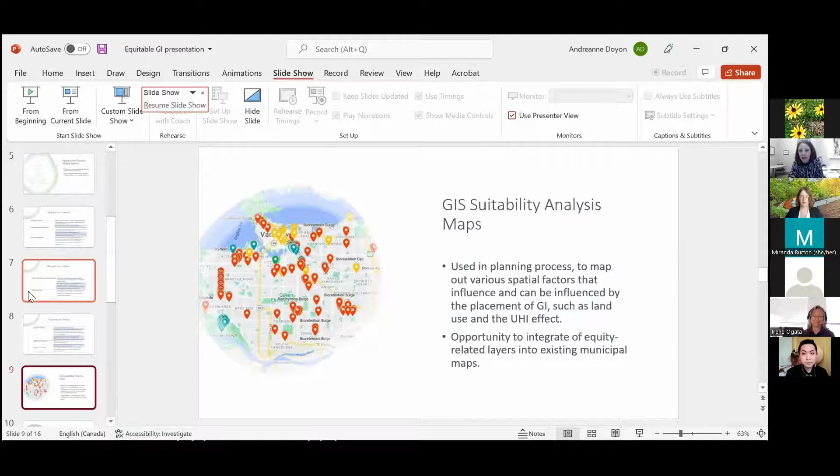And again, this is something that's used across municipalities in a variety of different ways. We developed, or brought together from existing resources, four different variables that should be kept in mind—built environment variables that cover the more technical and environmental components of green infrastructure.

Investment variables, so really focusing on areas of urban growth, but also looking at past capital investment locations. Looking at socio-demographic variables, and the importance of disaggregating that data so that you can provide different layers depending on target audiences, or being able to understand communities and locations and individuals differently. And then thinking about accessibility and health variables, as well as being a little bit different to socio-demographic.

So we think that having more of this information, I guess a big part of equitable decision making is actually about data, and the data that we collect and have available to us to be able to promote better decision making.

So in closing, it's really about acknowledging and internalizing that green infrastructure implementation or decision making goes beyond technical and biological considerations, and we need to think much more in terms of financial, equity, political, institutional, cultural, and so on.

And if we continue to neglect this, we're going to continue to perpetuate existing inequities and create new ones in terms of who has access to the benefits of green infrastructure. So our hope is that if more municipalities can incorporate these types of processes, variables, or dimensions into their work, we can actually lead to more equitable places through green infrastructure implementation.

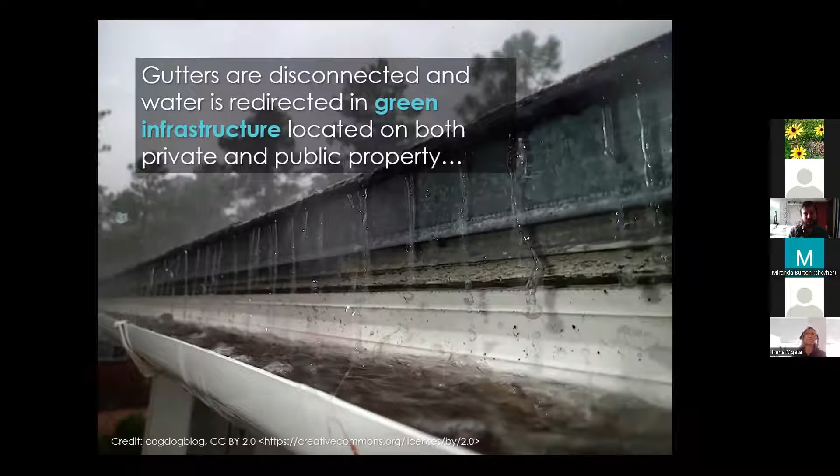This particular sharing of infrastructure between the public and private sectors we refer to as mutualization, which by definition is just the sharing of resources, whether human or material, between the private and public sector to achieve a certain goal. Here, it's to have green infrastructure. Before our project, it was not possible to manage water from private property on public land, so this was an innovation we had to work on to make this project possible.

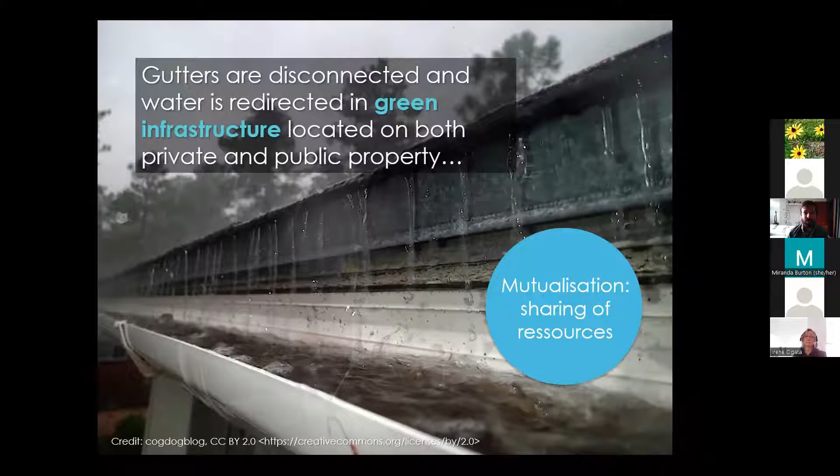The second aspect, which is really important to us, is that we take this opportunity while doing the green infrastructure to design the living spaces by and for the community.

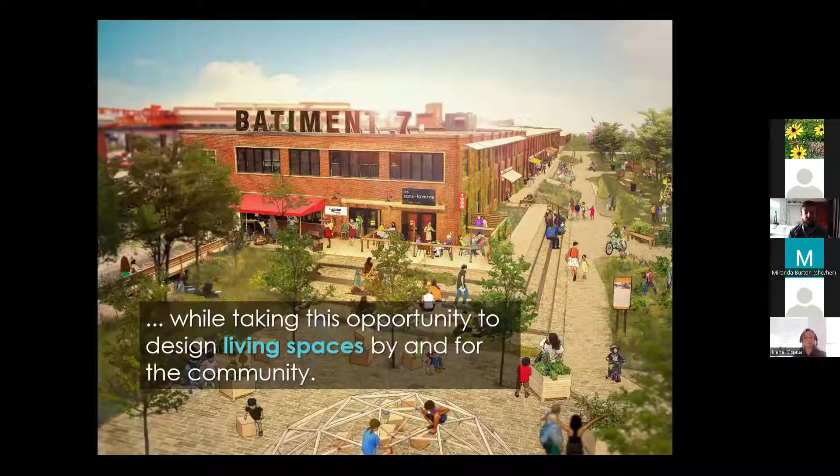We have many goals with the project: sustainable rainwater management, demonstrating that climate change adaptation is feasible, experimenting with innovative practices, and increasing community involvement in improving their living spaces. Today we'll focus more on community involvement as it relates to equity, but we'll also see some innovative practices we've tried to integrate, especially alternative modes of governance for green infrastructure projects.

The Blue Green Alley project sits squarely at number 5. It's really a decide-together, partner-type project.

Let me tell you more about this history so you'll get a better perspective. The Blue Green Alleyway project started in 2011 with the production of a service offer by Vinci Consultants, an urban planning firm in the city of Montreal. They proposed the concept of a Blue-Green Alley as a solution for rainwater management at a larger scale for the city. From then on, many partners joined the project through what we call the Alliance Ruelle Bleu Verte, an innovative partnership with 5 members.

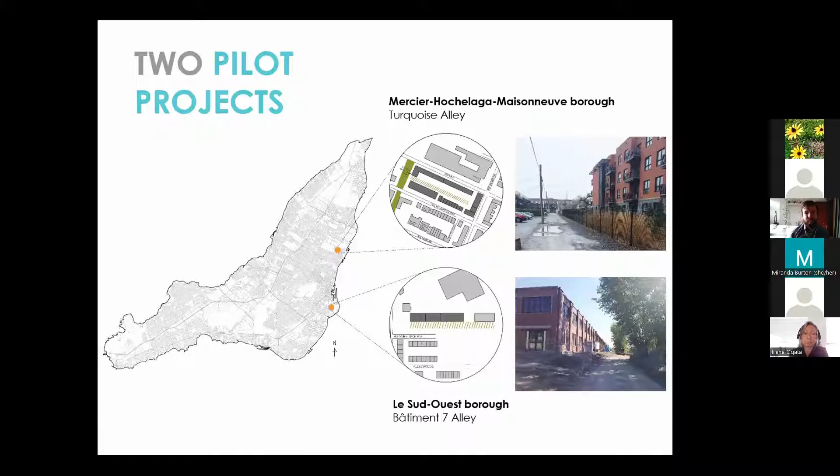We have 2, one in the Mercier Hochelaga Maisonneuve borough, so it's a turquoise alley. And we have another one in the Sud-Ouest borough, which is the Bâtiment 7 alley. And today we'll focus a bit more on the Bâtiment 7 alley.

It was chosen to move forward first simply because it was slightly simpler. There was only 2 owners to deal with, the 7 à Nous collective and the City of Montreal. So it was a bit easier for us to manage only 2 than many more landowners.

I won't get much into the details of what is the Bâtiment 7, but it is an extremely interesting project and demonstration of citizen reappropriation. So just a small history, in the early 2000s, these were buildings that were owned by the Canadian National Railway Company, and they were sold to a private real estate company for $1.

And it's through citizen protest and organizing that eventually the community gained the ownership of these buildings and these lands. And now they're managed by the community through the 7 à Nous collective. So it's really interesting, Google it. It's a fascinating project. But we'll focus more now on the alley.

We'll also work - it's going to be built during the spring and summer of 2022. So we'll work as well on how to plant trees, and we'll have an integration with the community. And all these activities led to the designs that I'm going to show you today. Not many people have seen it, so you can feel very special today.

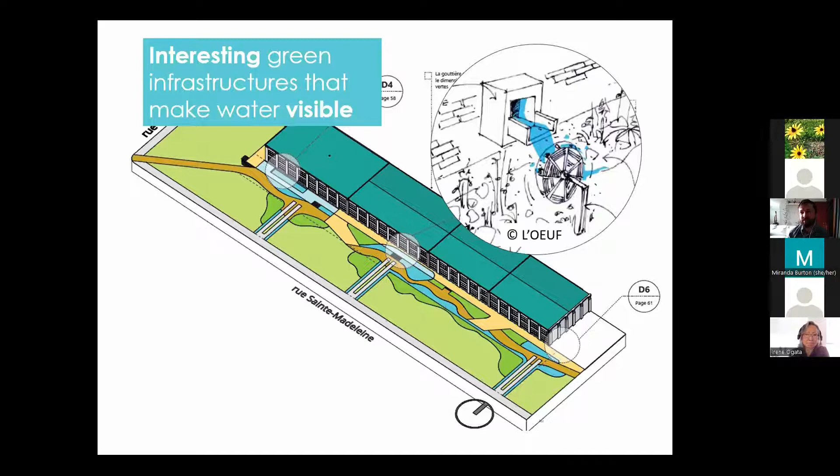And so the goal that was identified is to have some green infrastructures that were interesting to look at, that made the water visible, that were pleasing to the eye, but also that would bring back the water into sight. So we have some rain wheels that will be installed where the water will activate the wheel when the rain falls. We'll have some rain chains that will replace opaque gutters that will let the passersby see the water as it goes down.

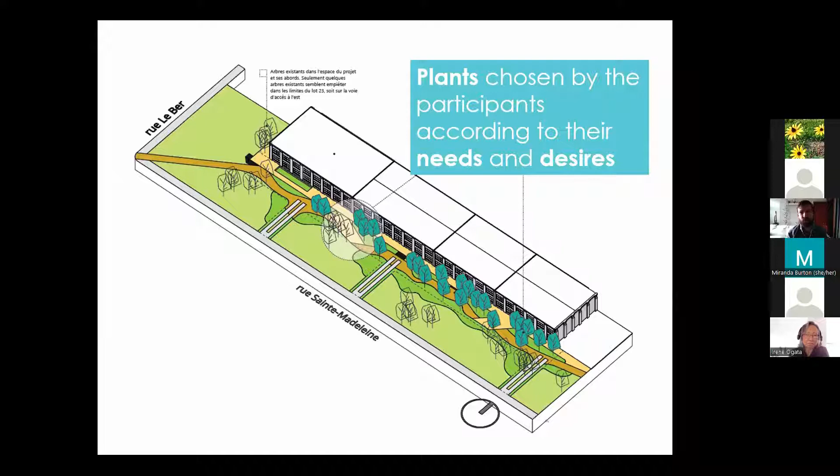We'll also, well, all the plants that were chosen by the participants according to the needs and desires of the community. There's even some spaces that were left purposefully undesigned. So we kept them blank so that the community can decide what's going to be there. They wanted some space for spontaneity that was really important to them. And so we purposely kept some places undesigned so they're going to be able to plant what they want or transform the spaces, put benches if they want, really whatever they want to do in the future that they haven't quite put their mind to it right away.

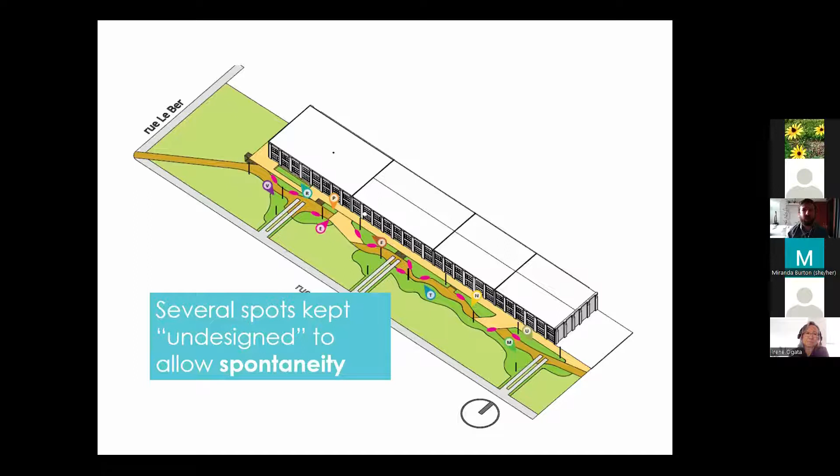And so quick lessons that we learned, which of course, integrating community organizations in the decision-making structure leads to projects that are closer to the needs of the community itself. And that's something that's not really surprising.

For example, recently, there were some concerns that were brought up because the Bâtiment 7, they want to have some childcare services, and childcare service facilities have some requirements for outdoor space for children to play. And that would overlap with the blue-green alley where there's a green infrastructure. But the Bâtiment 7 is on the leading team. We were able to address the situation and correct it very easily.

But also what we do see is that having the organizations in the government body also means that they get the money and resources to do the work. It's a lot, it's labor intensive to get all this information. They are experts at what they do at their living spaces.

And so if we provide the resources, they have the opportunity to do the work. And they also grow through the process because we give them money, time, and they can develop their staff and organization.

If you're curious about the project, you can go on the website, unfortunately only in French, ruelbleuverte.com. But if you're interested in our approach at Montreal Urban Ecology Center, you can go to participatoryplanning.ca. We have some resources if you're interested in developing this participatory approach. And of course, if you want some examples and resources, also the Montreal Urban Ecology Center, but then again, only in French, I'm sorry. If you have any questions, here's my email, don't hesitate.

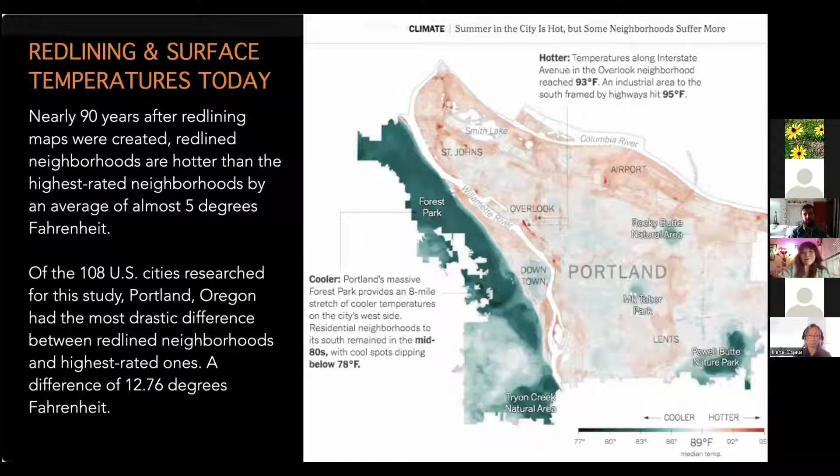And these are some maps, you can find them, they actually have quite a few. Sorry, I'm just making sure I'm not missing anything in chat. These are some basic maps as well, you can see the hottest areas are in fact the most low-income areas. I won't go into too much of it, but I encourage you all to check out what your city looks like.

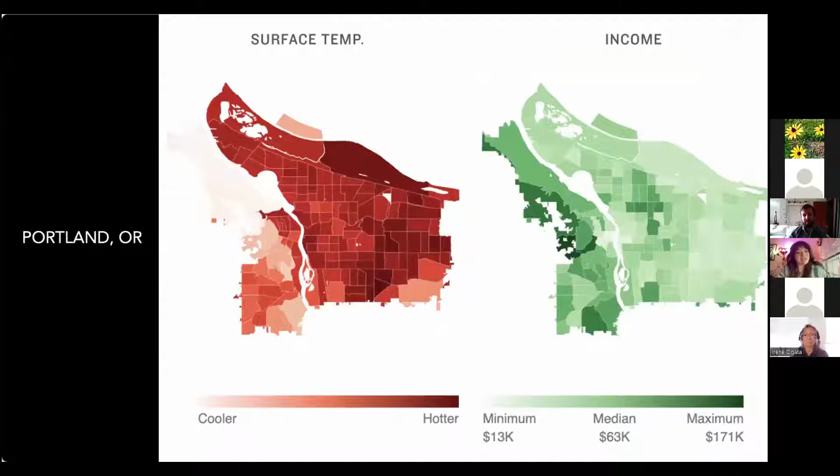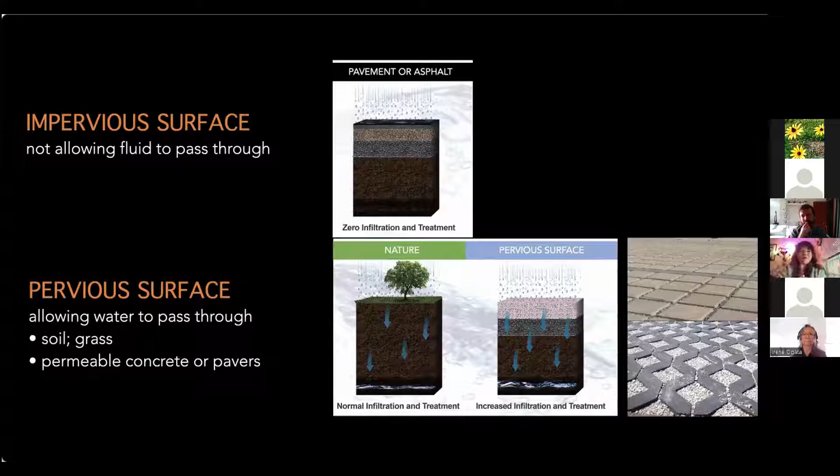I also won't go too much into this because you're all green infrastructure nerds like me, but essentially pervious surfaces allow water to go through, impervious surfaces do not. Depaving reduces stormwater runoff, reduces pollutants in our waterways, and mitigates flooding. We also always put in plants that help slow down runoff and also filter the water before it goes right back into our rivers here in Portland.

Some of the earlier speakers did an amazing job of already talking about site selection. Some things we consider before choosing a site: who it's actually serving. Is it serving a BIPOC community? Are we helping folks that can't do this project unless we help them? We're a really small organization, we can't go to every person that wants to do Depave, so we are very selective. Are there other green spaces nearby? Is the school serving mostly low-income students? Is it a Title I school? What's the walk score, things like that. These are all things we consider before we begin the process.

I'm going to focus more this presentation on an example project, which is at Powell Butte Elementary. This school is located in Southeast Portland in the Centennial School District.

One of the very first things that we did with this school is actually just showed up and asked the kids, what do you want to see here? I think this is really important to especially engage students and communities that have been historically disenfranchised. So maybe their parents and their grandparents did not get an opportunity to have any say in what's going on in their community, but we're going to try and give that back to these kids. So we feel like that's step one, asking the kids, especially the little ones who are going to actually see the project get into fruition.

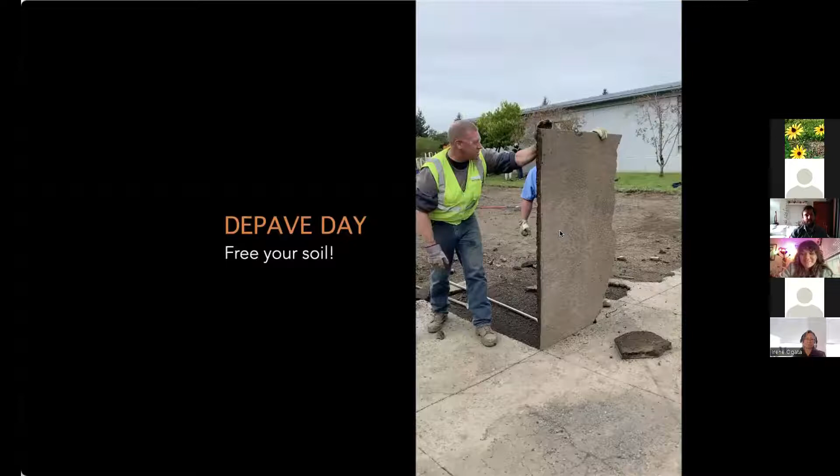So that's kind of what it looks like. You pull one up, you smack it down, and then you have the smaller pieces. That's really great too, because then the kids can pick up those pieces. So we have a little job for the kids to do too.

So we actually have 6, 7, 10-year-olds, all ages, and folks also that have different abilities can participate.

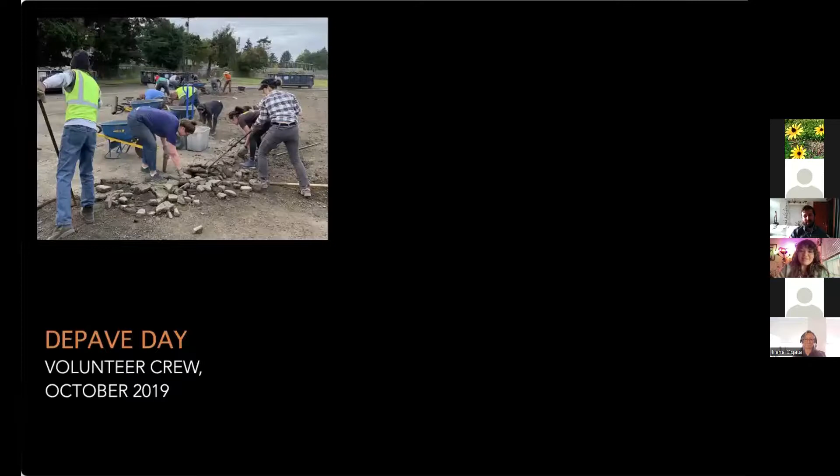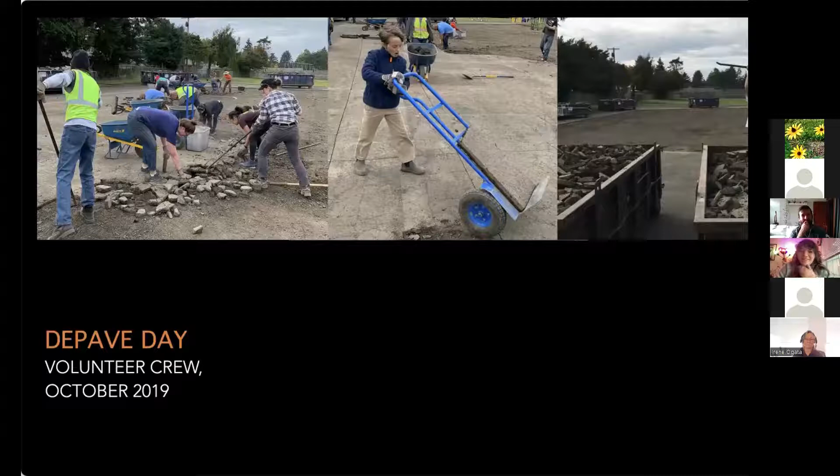Bencho told me he had never installed permeable pavers. He had installed pavers, but not permeable pavers. And I was like, you can just learn. You can use this project as a way to learn, and we trust you, take your time. And that's what they did.

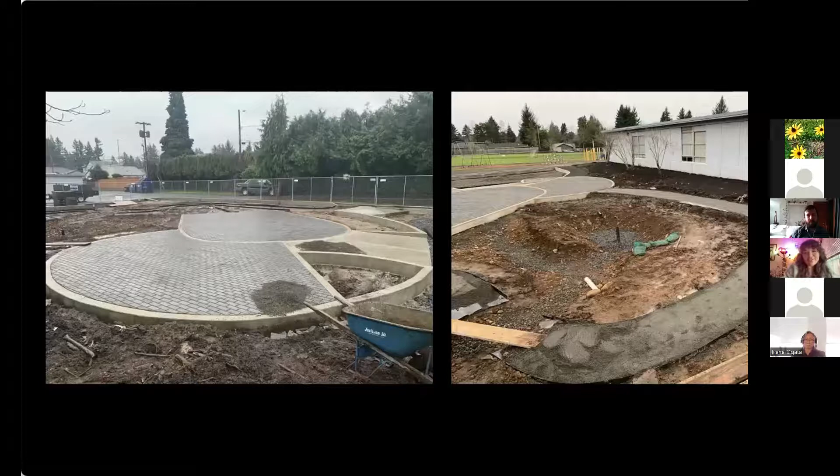So this is sort of construction photos. I'm going to zip through these rather quickly just so you can get an idea of what they did. They poured all these curbs, put in gravel paths, did plantings, installed this little stage, a footbridge, and they did this with pretty simple plans—we gave them liberty to do how they felt was best.

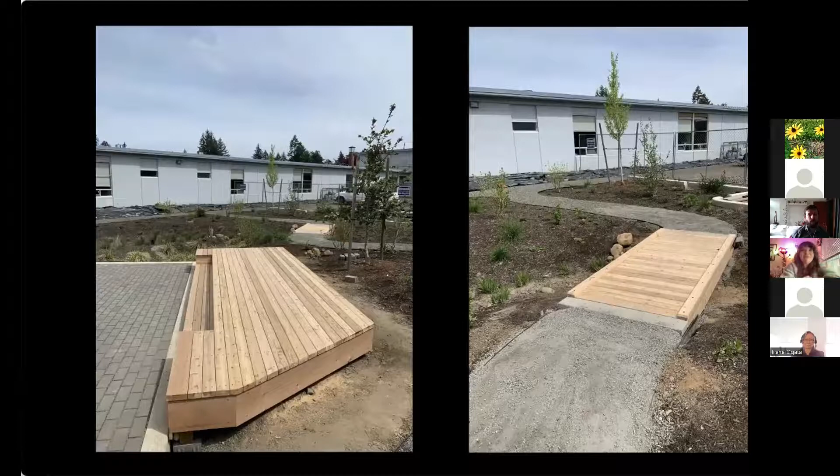And that's what it looks like as of last summer. It's pretty beautiful, the plants are coming in pretty nicely. It's very sweet—the staff at Powell Butte were really okay with watering it over the summer. Last summer was a major heat wave, and we were like, you gotta water it.

So they've been really great about that. We gave them some sprinklers, and the staff are just really excited. They've already told us the classrooms that face this area are significantly cooler than before. The custodian came out and told me he's in there a lot of days waxing the floors and cleaning, and it's so much more pleasant because he's no longer burning up. So that was really nice to hear.

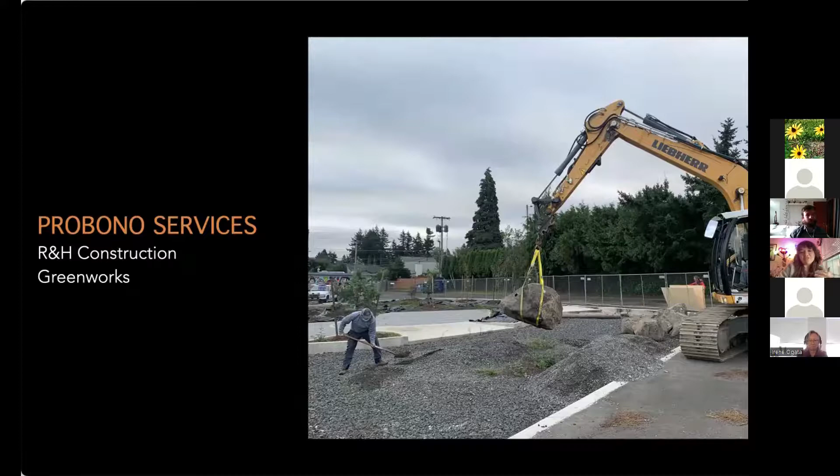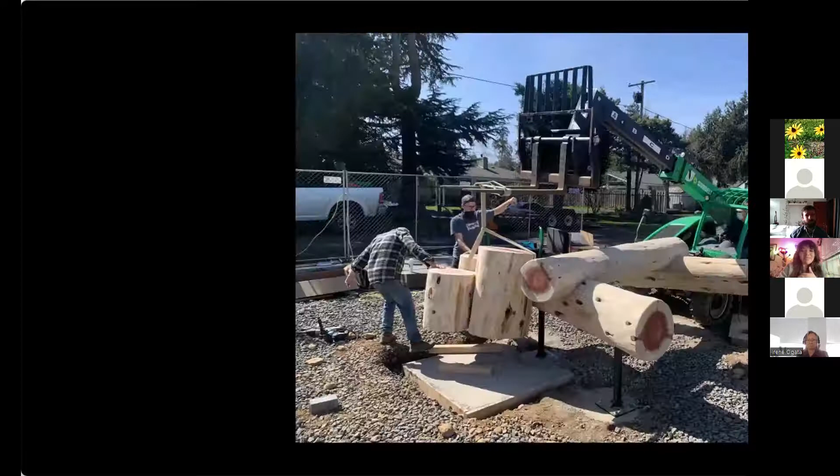We also work with some contractors. I mentioned Greenworks earlier—R&H Construction also donated their time to help us put in these boulders, a boulder climber. They came out and did some concrete pouring, helped us lay out the logs. This is them donating their time to install these logs. That's sort of what it looks like now from that angle.

And we also had the high schoolers across the street. A lot of them actually attended this elementary school when they were kids. They came out too, and they were giving back. So that's what it looks like now. Thank you so much.

Awesome. Thank you, Katya. I love that. When you first shared your slides with me and I looked at the before and after, I was like, wow, that is way better. Yeah, it's super cool work. Thank you for sharing. And thank you.